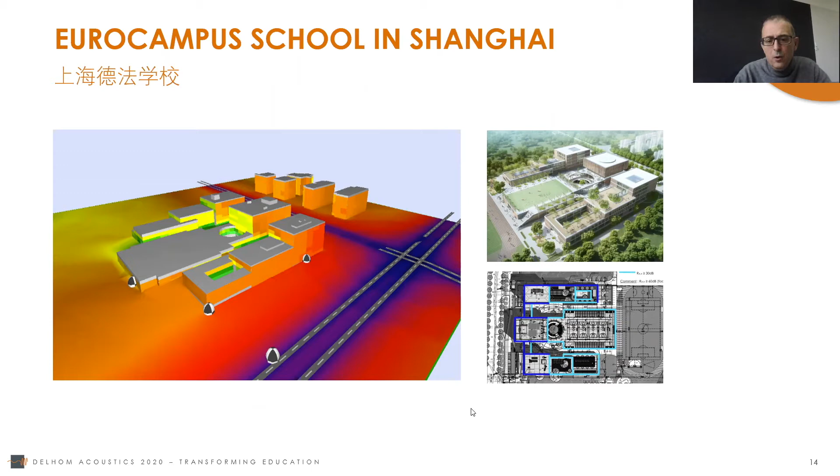So this helped to get the right insulation, to use the right windows, the right glazing, and save money, because we avoid over-treatment and reach the targets. So these are some tools we use designing the facade insulation to avoid the distraction and control the noise inside the rooms.

We have also the internal insulation between spaces. So here is an example between two classrooms. Very often when we are addressing the issue of the insulation between two spaces, most people will think about the noise through the partition wall, and they will sometimes use a very complex or heavy, thick and expensive partition wall. But at the end, most of the time it doesn't work because noise doesn't travel in one direction.

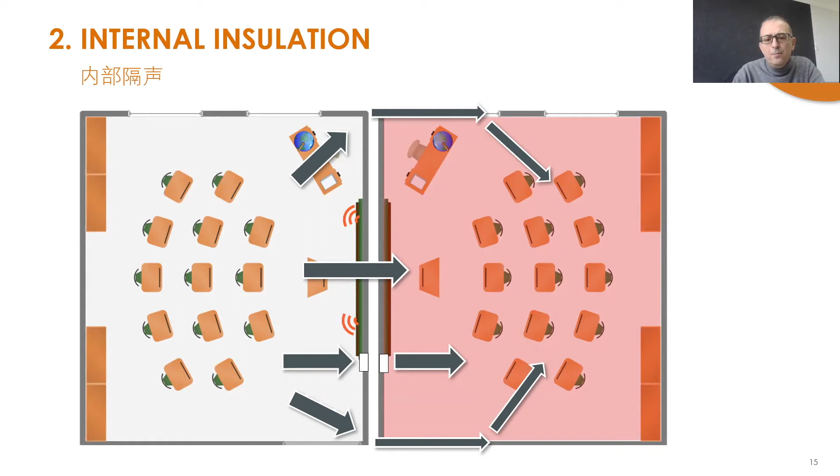It can go through lateral transmission, through the facade, and can also go through defects, like in this example, electric sockets. So at the end, even if we spend money on a high performance partition, we won't get the right results. So what we need to do when we address this issue is to design properly the partition wall, and most of the time it will be a thinner, less performant and cheaper partition.

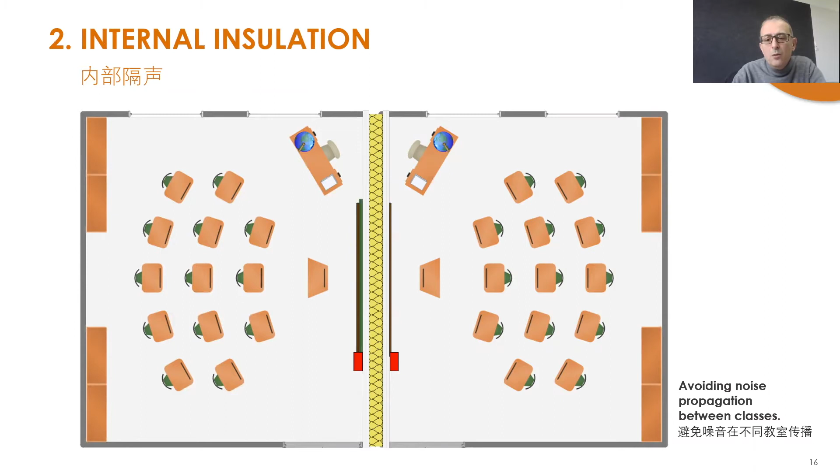But at the same time, we need to address all the defects like the junctions, control the noise going through the lateral transmission, through the defects, and then we can get the proper insulation. So it's not only a question of performance of the partition wall, but it needs to be addressed in the globality of the transmission of noise.

Speech intelligibility. This is a very important issue in the classroom. So what is speech intelligibility? It's the capability of understanding what is being said in the classroom. And when the speech intelligibility is not good, it doesn't mean that people won't understand, because you have some parts of words which are missing, but with the context, our brain will work to recreate the missing parts of words, and then we can understand.

But this process is very tiring. In fact, our brain is working, unconsciously, to recreate the missing information, and then we understand, but we get tired. So after long hours of classroom, people get really tired, and then we lose the good learning process.

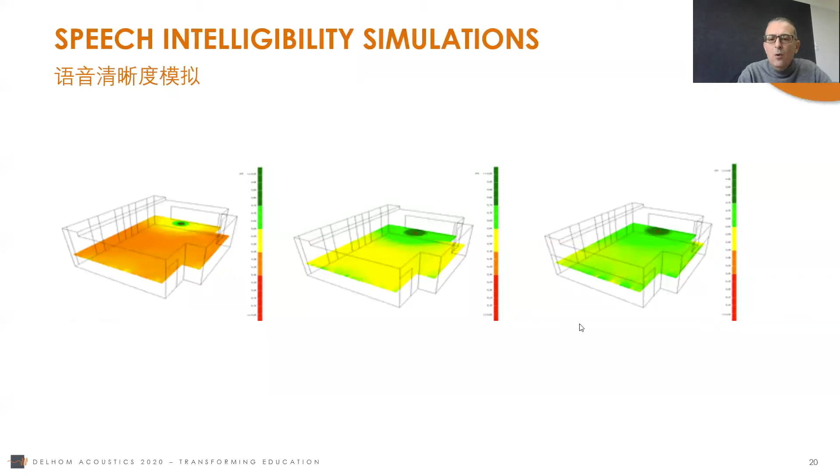We have to know that sound is divided into different frequencies, and each material will bring some absorption in different frequencies. So in general, to get the right balance and the best speech intelligibility, we mix different material properties to get the right targets in terms of reverberation and then speech quality, speech clarity.

And the last point, but it's very important too, is the noise from the technical equipment, because speech intelligibility depends on the reverberation of the space, but also on the ratio between the signal, the voice, and the background noise. So if we have too high a background noise, we reduce this ratio, so we decrease the speech intelligibility.

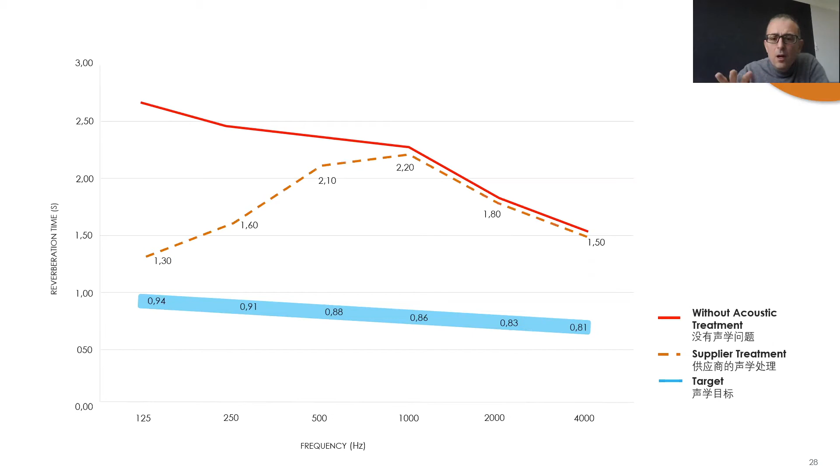So again, this means that there is no one magic acoustic material that can solve all issues. It depends on the room, on the materials, on the shape and the volume of the room, and only by simulation and calculation can we know what amount of materials we should use, how to implement them and what acoustic properties they should have. Some materials will be more efficient in the medium or the high frequencies, and that's what they should have used to solve the issue. So just to say that there is no one magic pill to solve any issue.

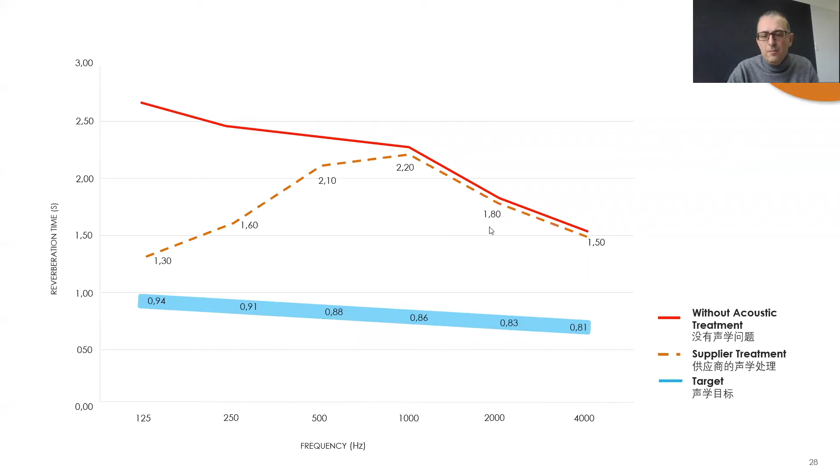Here is an example of a canteen we did, and it shows the different materials we use. So here we used these bars that the designer wanted to use. So we used them as diffusers for sound, to spread the sound in all directions. We also use the property of the green wall they wanted to use. So this brings us some absorption in the low medium frequencies.

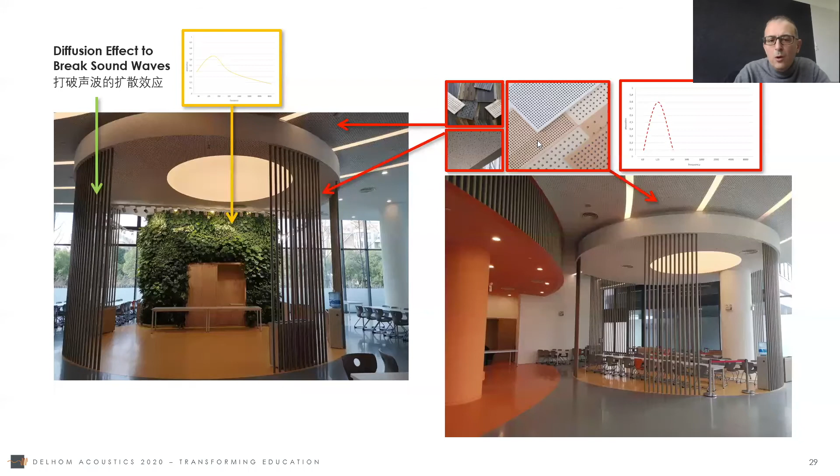We can see here we use acoustic ceilings with perforated wood and gypsum board to absorb the lower frequencies. We use porous absorber on this ceiling to bring absorption in higher frequencies. We use it also on this part here behind the bars, but it's not shown on the picture. So the solution was to mix different properties of materials to reach the perfect balance in terms of reverberation, and then to control the noise propagation and the speech intelligibility.

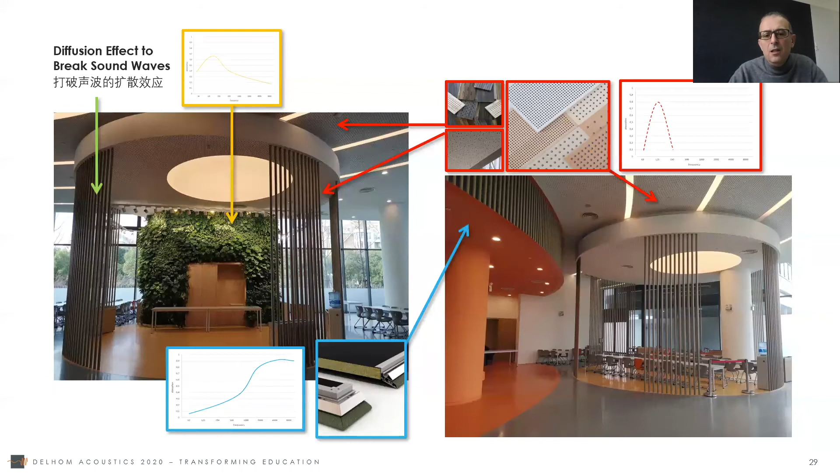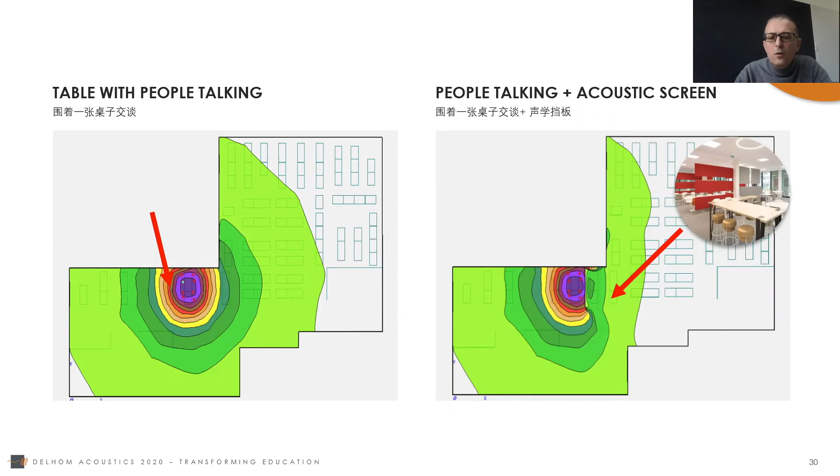And this is to show you that the acoustic design, if it's included into the design from the beginning, it's very easy to respect the materials, the design intentions. This is how we do all our projects, understanding what is the intention from the designers, and then find the products with the proper acoustic properties that will reach both design intention and acoustic targets. So this is really possible, and it's what we do on all our projects.

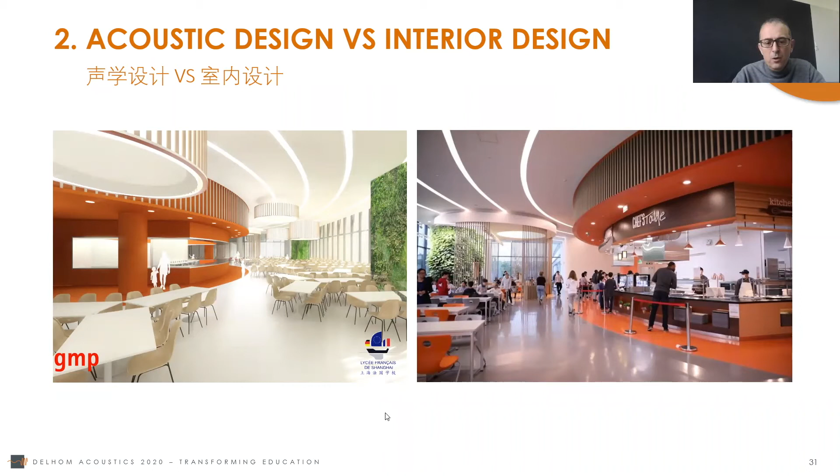The music room is interesting too, because we have similar problems like the sound quality, clarity of sound, but also the insulation. So I will go through just to explain why it's a bit different. Because for the clarity of sound, the quality of sound, in fact, we can have different targets, and it's always very important for us to understand how the pedagogical approach is conducted, because depending on the reverberation targets we will have, it can change the behavior of students and teachers.

So I'll show you these short videos of two different environments, one with high reverberation and the other one with low reverberation. So you can hear the difference, and I will explain why it's important. So we have a saxophone playing first in the reverberant room with high reverberation, and the second one is in a very dry room with almost no reverberation.

So in the first case, we get a nice sound. It sounds really beautiful because we have all these echoes, but it's very difficult to hear all the small defects we can have in the sounds, especially for instruments like violin or saxophone, which require a very precise way of playing. And in the second one, with no reverberation, it's very clear, it's very analytic, so we can hear all the small defects.

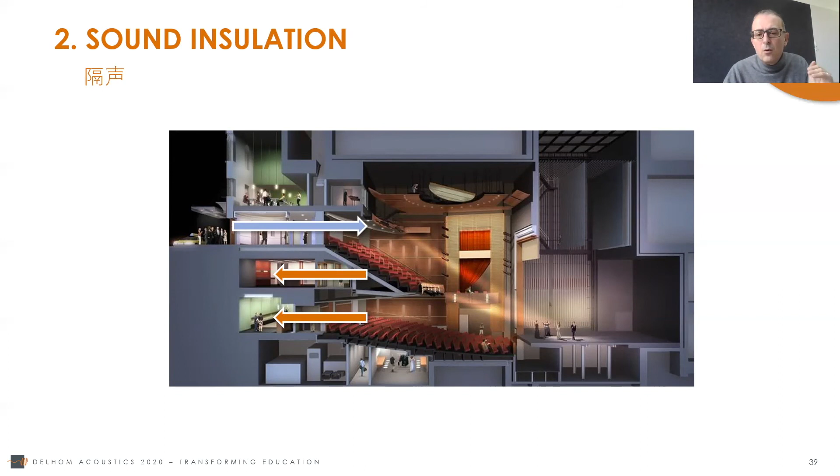The main difference here is that, generally speaking, the volume is bigger. It's much more complex, so we need to address a lot of possible paths. But the principle, the way we do it, is the same. It's a 3D modelization of the space, and we address all the weak points, all the possible transmission.

Then the background noise level can be a strong issue, knowing that in a theater we have a lot of people, so it means we need a big amount of air, so a big airflow, and this, if it's not properly addressed from the beginning, can be a big issue, because it can bring a very high air speed. So we need to control this from the beginning to be able to properly dimension the size of the ducts, to control the airflow and the airspeed, and be able to implement silencers that can be quite big because of the importance of the airflow. And this is, I would say, easy to solve at the beginning because it's the early design.

So we have the room, we have the space, we can ask for the space. But once the design is done, it's always very complex to ask to have a bigger room or change the size of the ducts or implement a big silencer, because it has not been planned, and then we don't have the space. So again, this technical noise is easy to solve, but if it's not addressed properly from the early beginning of the design, it can become very complex.

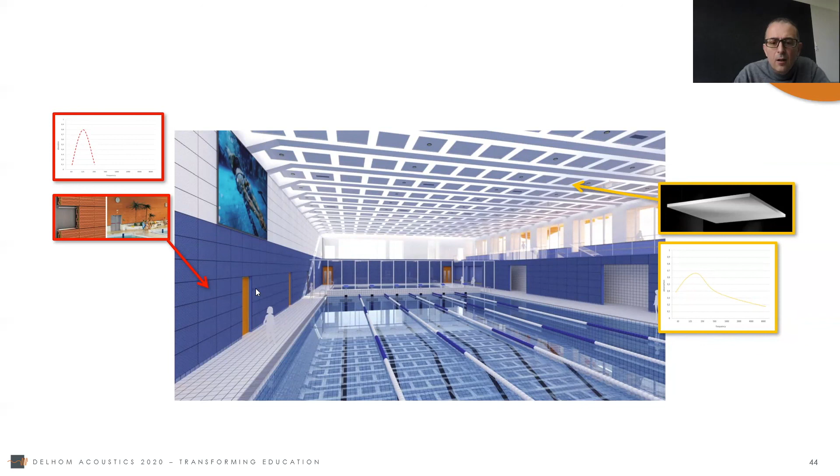So here on the walls we used perforated bricks with rock wool that bring absorption mainly in the lower frequencies, and we used suspended islands on the ceiling, porous materials, but the way we use them, with a big air plenum behind them, can bring absorption also in low and medium frequencies, even high frequencies, in fact. So this is an example.

For the impact noise, especially when the sport areas are close to sensitive spaces like classrooms, we can have the transmission of the shocks in the structure of the building that can transmit the noise at long distance. So in that case, we need to use technical solutions like floating slabs that can avoid the transmission of the noise.

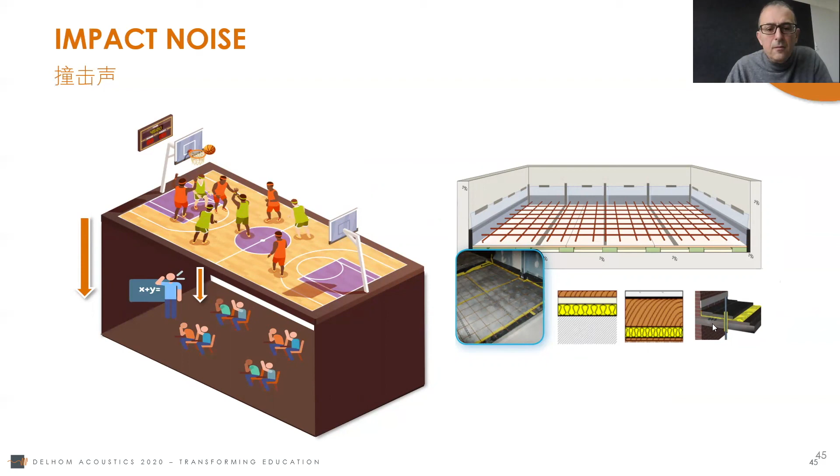And to finish, because I've been a bit long, I will speak about the library. In the library, we have two main issues, distractions and noise propagation. So I'll go quickly because I'm over time. The targets here are a bit challenging, because in this space we need two things that are a bit conflicting. We need to be able to work together and communicate, so to have good speech intelligibility, but at the same time we don't want to disturb others, which means poor speech intelligibility. So this is a bit challenging because it's conflicting.

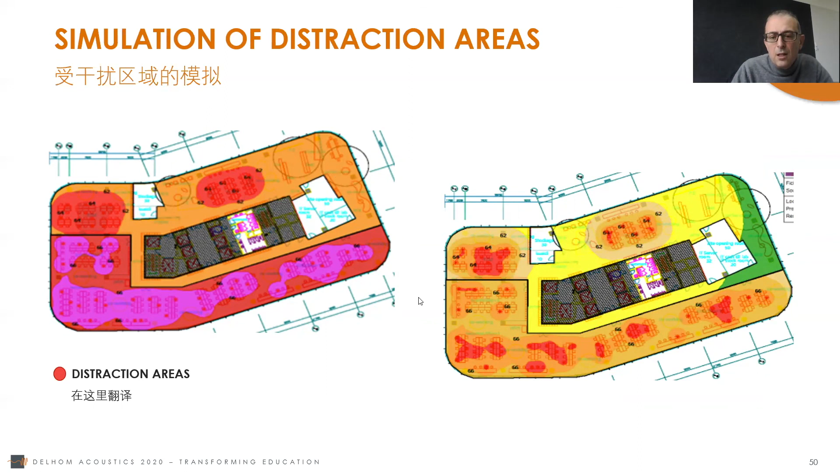So we use, again, simulation software that allows us to predict how the noise will propagate and what will be the distraction areas around people talking, so as to keep good speech intelligibility at short distance and avoid long distance propagation. This is the only way to succeed. Here is an example of a library we did with different materials and implementation that allow us to control the noise propagation and the speech intelligibility.

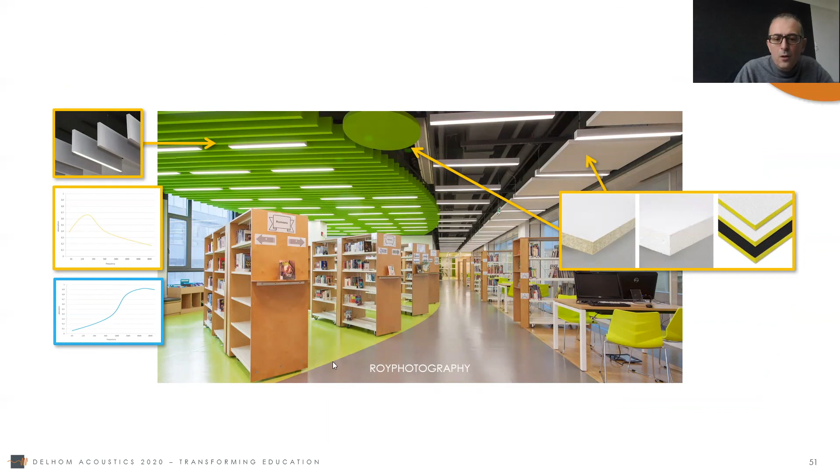And to finish, I'm sorry, I've been a bit over time. Three things I'd like you to remember. We have been through different examples. Acoustic comfort is a key element in a successful school. The second one is that every area in the school has its own targets and then its own solution. So there is no one magical solution that can solve all the issues.

And the third thing I'd like you to remember is that acoustic design should be part of the design. It's not something that we can add at the end. That won't be efficient, it will be very expensive, and it wouldn't give the best results. So we need to think about acoustic design very early in the design process of the school.

And so what we can say is that having good acoustic comfort in the school will help to improve teachers' performance, will help to improve students' performance, and in the end, it is the performance of the school that will be improved. So thank you very much.